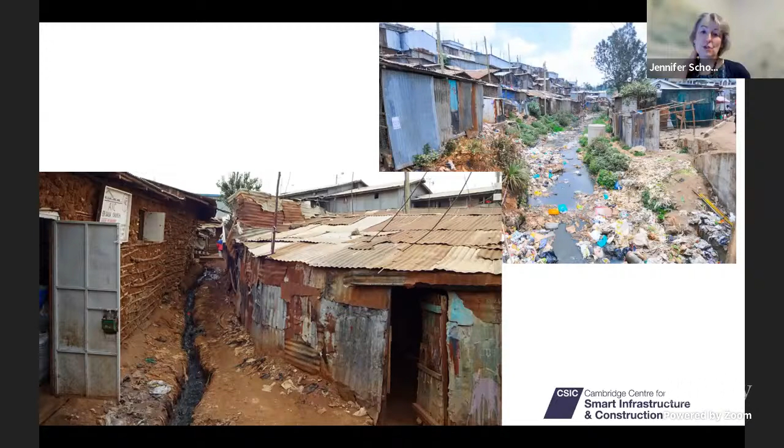It's not a terribly conducive environment for businesses to set up, and it's certainly not a particularly healthy environment to be living in. So without good infrastructure, this can be what life is like.

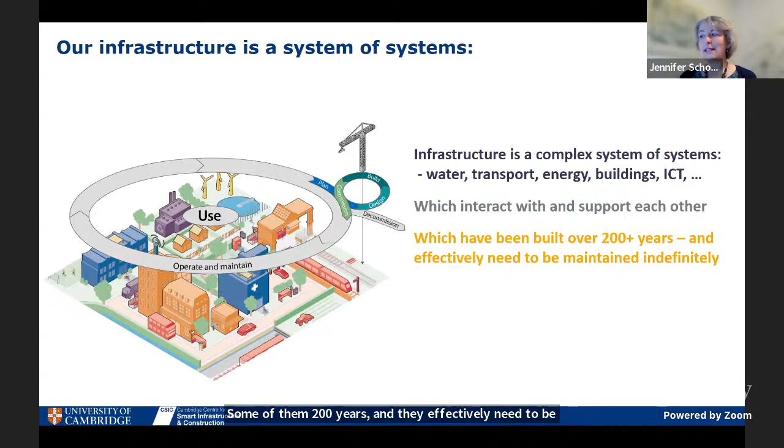The other key thing is that, certainly in large parts of the world, these infrastructure systems have developed over centuries. So in the UK and in the US, a lot of our infrastructure systems date back well over 100 years, some of them to 200 years, and they effectively need to be maintained indefinitely. The other thing is that these systems, although they are systems of systems, weren't really designed that way - they've sort of evolved and emerged. So they're quite complicated; it's quite complicated sometimes to understand all of the interdependencies between them.

The other important thing to remember is that every year, in developed economies, we only add about 0.5% by value to this complex system of systems. So in the UK we've got a number of huge infrastructure projects going on - a big high-speed rail project, and a massive super sewer being dug through the centre of London. Each of these huge projects, although they're costing many billions of pounds each, is a small intervention on that much bigger system they're going to be part of when they're finished.

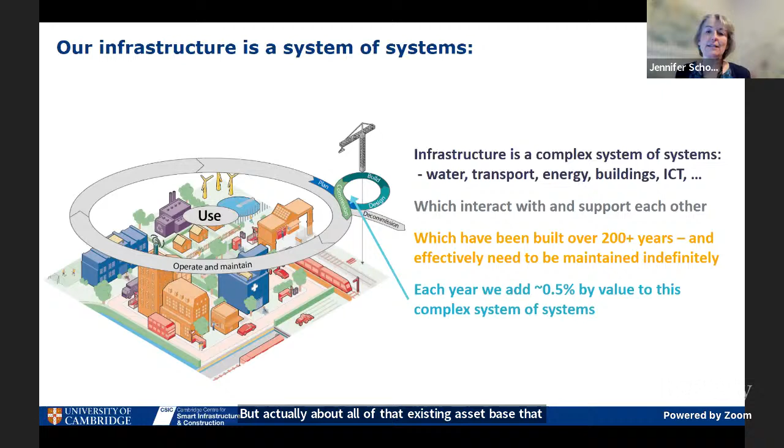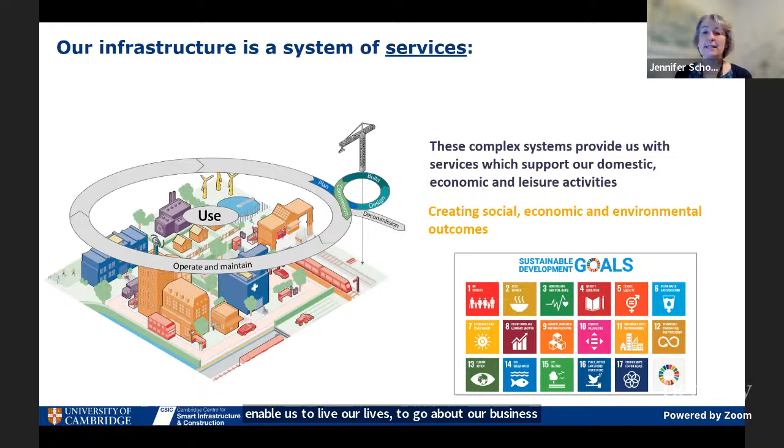So we really need to think not just about the new stuff we're building and managing, but about all of that existing asset base we have, which is what is actually providing the services and the value to society. These complex systems provide those services to enable us to live our lives, to go about our business, to have fun, and they basically facilitate well-being for us.

Because infrastructure assets last for such a long time, we need to take a whole life perspective of them. We need to think, if we're designing an asset or maintaining an existing asset, how long do we expect this asset to be used for?

If we are building a new asset, we need to think about the whole life carbon. If we invest a bit more material and carbon now, will that help us reduce use carbon into the future? Or might it have a very short life, in which case investing additional materials and carbon will be a waste?

How can we make the use of all of our infrastructure systems more energy efficient? And how can we make our systems easier to maintain? Because we live in a resource constrained world and a carbon constrained world, so every time we make an intervention on a system, we want to be maintaining our assets for as long as possible and keeping them functioning for as long as possible.

So it behoves us, when we're designing them, to think about how we're going to maintain them in the future and make that as easy and as resource efficient as possible a process.

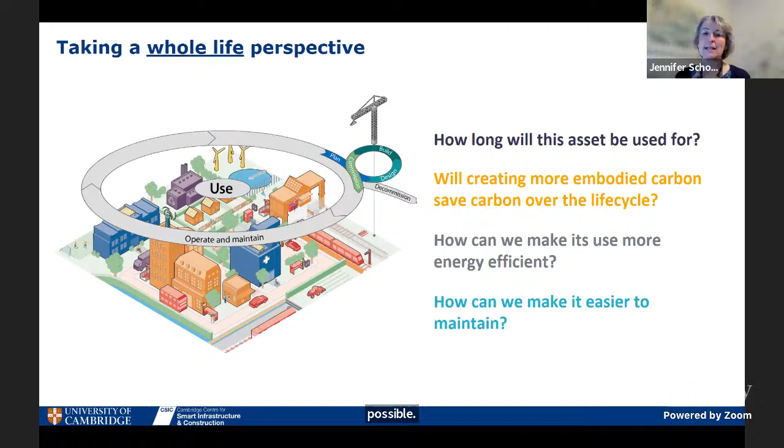Civil engineers have responsibility for designing, building, operating, managing and integrating our infrastructure and built assets essentially in perpetuity.

This picture is an image of Liverpool, for those of you familiar with the city in the northwest of England. This is the Liver Building. One of the reasons I like this picture is it shows you a lot of very old infrastructure - we've got some old warehouses in the middle of the picture there, alongside a lot of very modern infrastructure, like a telecommunications tower of some sort there.

We've got wind turbines out in the ocean generating energy. We've got a port here, which is an active port bringing both passengers and goods into the northwest of England. So this picture really captures the complexity of our infrastructure and how it sustains our cities.

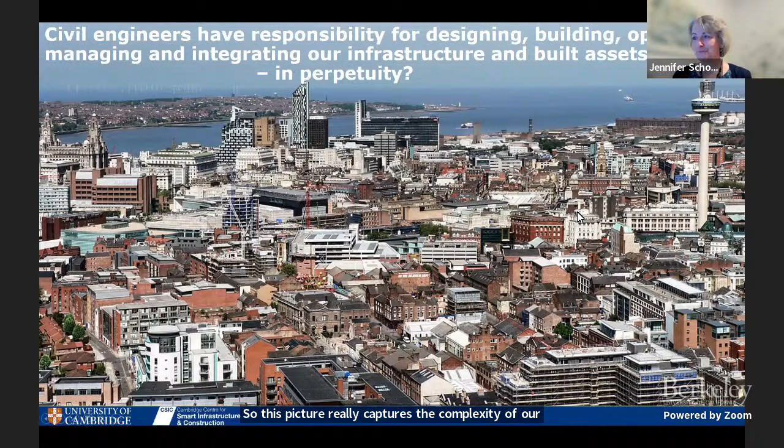So how can we use data to help us gain insights about our infrastructure systems? That's a very important question to answer. So what do we mean by cyber-physical systems first?

Cyber-physical systems are essentially systems where we use sensors and data from our physical assets. We analyse that, perhaps via a digital twin, which is the current buzzword, and we use that to make decisions and make interventions back onto the physical asset. So there's this sort of symbiotic relationship between the digital twin and the physical twin.

And we need that data about our infrastructure to design it, construct it, and to maintain it well and keep it operating efficiently throughout its life.

So adding sensors to our infrastructure helps us to collect better data, collect it more often. Rather than the traditional approach of people going and looking at infrastructure and taking notes, we now can capture digital data about our infrastructure consistently and potentially continuously, if that's helpful to us. Essentially, that's what makes up this smart infrastructure that I talk about a lot.

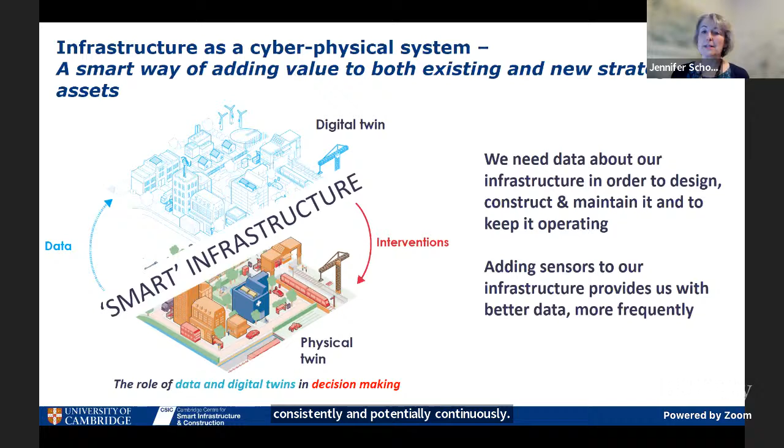In CSIC, the Centre for Smart Infrastructure and Construction, that I run, we talk about transforming the future of infrastructure through smarter information. We use that smarter information, gained from the use and development of sensor systems, to help with performance-based design - understanding the real performance of our assets - to help transform the way we build and construct our assets and the way we manage and operate them, and also how infrastructure serves our cities and communities.

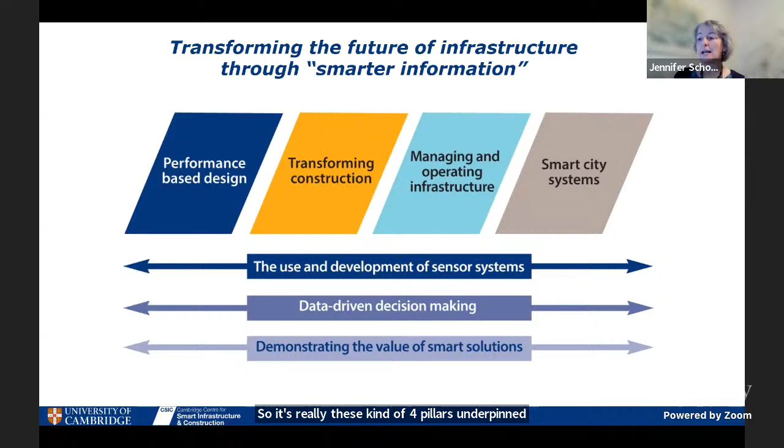So it's really these four pillars underpinned by the use and development of appropriate sensing systems to help with data-driven decision-making.

And I'm a big fan of Lord Kelvin, who back in 1883 said, if you don't measure it, you can't improve it. And he's absolutely right. If we don't understand how something is actually performing, how do we know whether we're making a difference to it or not when we design things differently, construct them differently, or try to make them perform better?

So very much in CSIC, we look at learning from real performance, so that we can reduce uncertainty, both in design, in condition assessment, in construction and in asset management, and also so that we can create infrastructure solutions to make our cities more resilient.

And ultimately, we look at how we deliver knowledge, tools and approaches to help us meet the three grand challenges of our time around resource scarcity, the drive to zero carbon, and the need for resilient infrastructure.

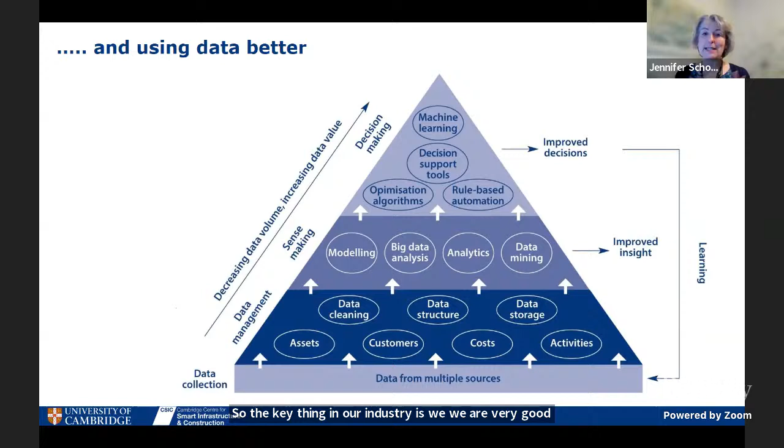The challenge really, though, is not only using better data, but using data better. So the key thing in our industry is we are very good at generating data. It's not always digital data. Sometimes it's paper data. Worse yet, sometimes it's PDFs, which are not digital data, if anyone tries to tell you that they are - they're just digital paper. But the challenge is often data in our context is generated, looked at once, and then either archived somewhere it can't be brought back from, or thrown away. So we don't gain insights from it.

We don't learn from it by looking at time series of data to understand how perhaps the response of a bridge is changing, for example. So the crucial thing about digitalization and smart infrastructure is that we must curate our data. If you take nothing else away from this talk, please remember that data curation is crucial to being able to better understand our infrastructure. These assets, which we hope will last us for many decades, if not centuries, we really need to think about how do we manage data about them over the whole life cycle of the asset, so that we can analyze it, create models from it, and draw sense from it to inform our decision making, giving us better decisions and improved insights about our assets.

If we have that better data, then there's a whole range of things that we can do. For example, in design, we can calibrate models so that we can end up with better resilience and lower resource use. For construction, we can improve the processes so that we reduce waste, reduce capital carbon, improve quality and delivery, for example. And in operations and maintenance, we can take approaches around things like future-proofing, condition monitoring, and risk-based maintenance and management approaches. And in the smart city realm, we can really think about the infrastructure needs that our cities and communities have. For this talk, you probably hear quite a lot often about design and construction processes, so I'm going to focus on a couple of examples from operations and maintenance and from smart city systems for the rest of my talk.

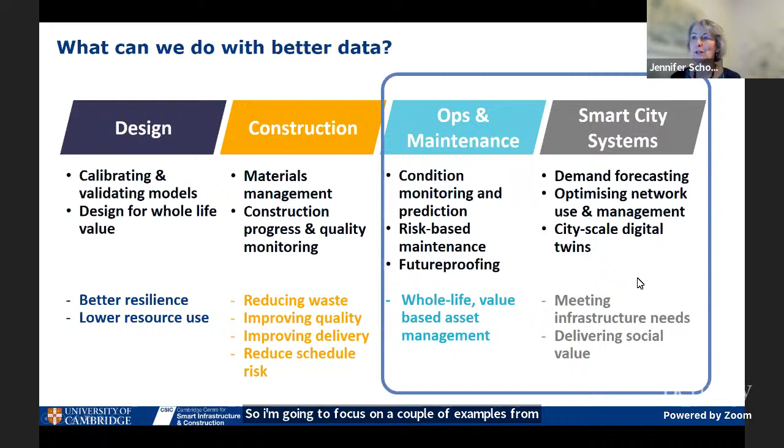So whole life value-based asset management. Asset management is the discipline of creating value for your business or your enterprise from your physical assets. So whether that is a water company, or whether that is a railway company, or whether that is a bank sitting in a building in downtown San Francisco, it's about understanding how the asset brings value to your business. Now, for the big linear infrastructures like rail, power, water, and so on, clearly the value to the business is very much tied up in those physical assets that are being owned and managed.

And this value is brought both through individual assets - if you look at the bottom here, at the individual asset or project level - and also at the network level. So we need to understand, for example, the budget that we have to manage a whole system of assets in order to understand what interventions we can afford to make on an existing asset. But likewise, we need to understand the condition of our existing assets in order to make sure that they continue to function within our network and continue to be able to provide the service.

So I'm going to focus on bridges for this part of the talk, with thanks to my colleague Manu, who provided me with these slides, some work that we've been looking at around how we understand risk in asset management and how we take account of that in the way that we think about our need for maintenance and management of our physical assets.

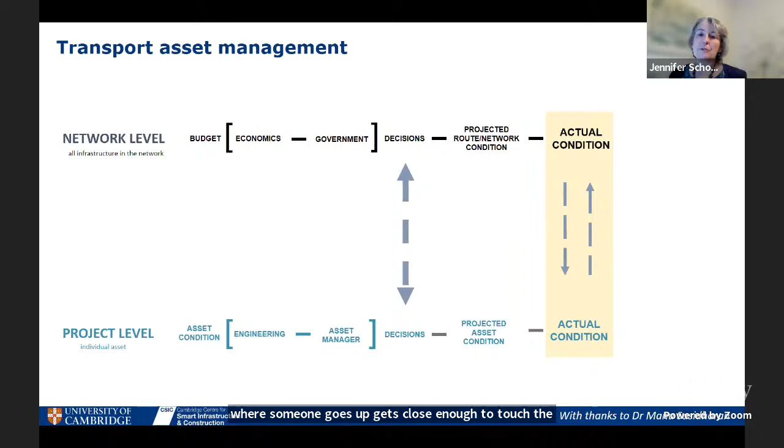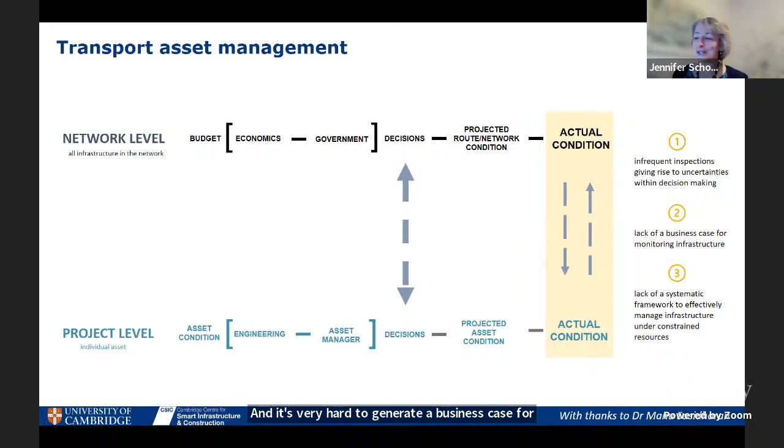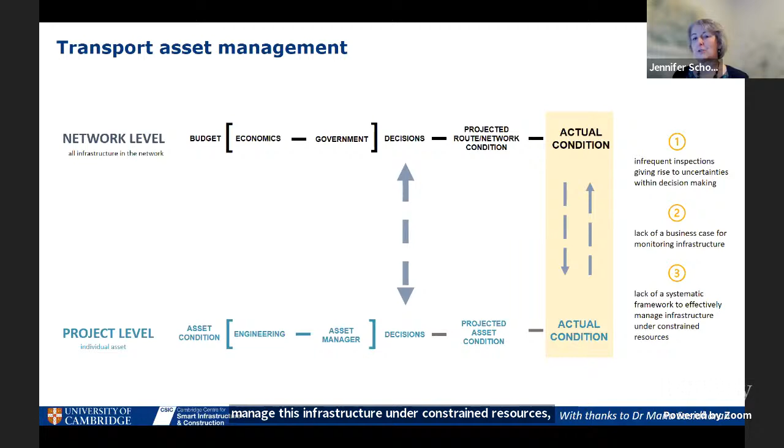So the challenge is that these infrequent inspections mean that we have uncertainties in our decision-making processes, and it's very hard to generate a business case for monitoring infrastructure because we don't really understand the condition of the infrastructure in the first place. And because we don't have a systematic framework to manage this infrastructure under constrained resources, we are increasingly at risk, particularly in the context of climate change, of our assets failing.

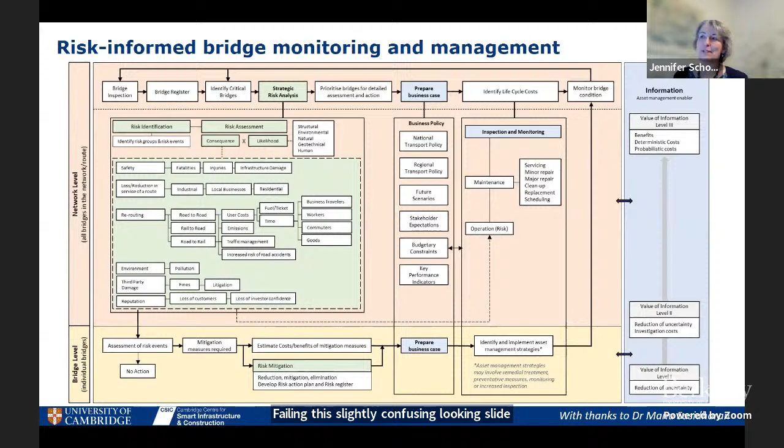This slightly confusing looking slide is looking at how we can take an approach to risk-informed monitoring and management. The key thing is that one needs to have a register of one's assets to start with, and one needs to be able to identify critical bridges. Critical bridges are the ones that are vital to the network.

So they might be a node which, if it failed, would cut off part of the network or cause need for a very long diversion, or they might be a bridge that carries, for example, several mass transit routes.

Once you've identified your critical bridges, then you need to do a strategic risk analysis about these bridges, which includes identifying all of the risks that the bridge may be subject to, assessing the consequence and likelihood of that risk. The consequence of failure, for example, may well be safety in terms of fatalities and injuries, but all the way down to things like reputation. And likelihood is based largely on the condition of an asset and the conditions it will be seeing in terms of environmental conditions and so on.

So these elements of the risk assessment are really important. I think I've highlighted reputation here because often, as engineers, we forget that if an asset fails, it's not just about the cost of reinstatement, it's also about the disturbance to the service that causes. So if a bridge fails, transport can't pass.

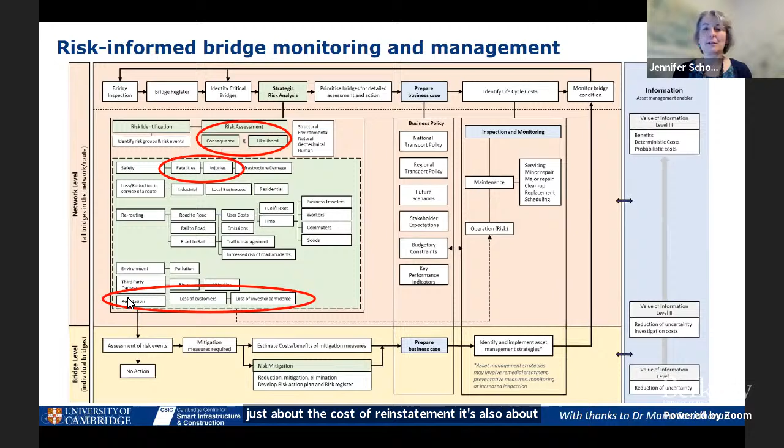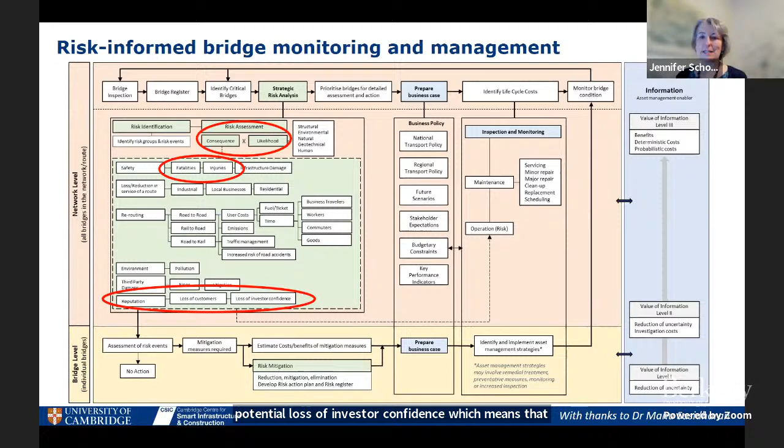If a water main fails, you can't provide fresh water to citizens. And so that comes with a loss of reputation and a subsequent loss of customers and potential loss of investor confidence, which means that it becomes harder actually to provide your service, maintain your systems and so on. But we're generally doing all of this within budgetary constraints.

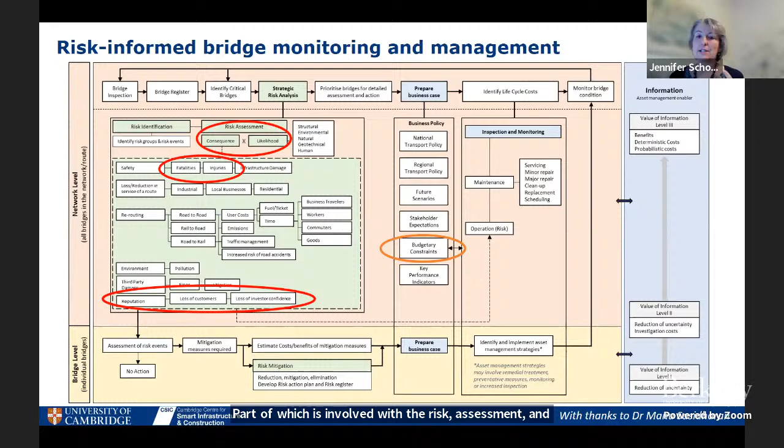So we have to understand how to prioritize our interventions, part of which is involved with the risk assessment and understanding actually which bridges are most critical in terms of our ability to deliver service.

So in terms of individual bridges, you have your business policy, which is informed by, for example, national transport policy, regional transport policy, any future scenarios that we may be considering, stakeholder expectations, etc. Inspection gives us a register of bridges which are potentially at risk, and our criticality assessment tells us which of those are most vital to our network.

So that helps us focus which bridges we need to prioritise for monitoring. And once we get that monitoring data, we're in a much better position to understand what maintenance is required and when, and to carry out life cycle cost analysis.

So sometimes an asset may need repair, but it might not absolutely need repair today. What we need to understand is the consequence of, for example, delaying that repair—will it end up in a much more costly repair in a year's time if we can't schedule it in this year's budget? And that's all very important, but it's quite tactical.

And what our asset management often doesn't take account of, and increasingly needs to, is the impact of challenges like climate change on the condition of our asset base. So I'm going to talk a little bit now about the work that Manu's been doing around future scenarios.

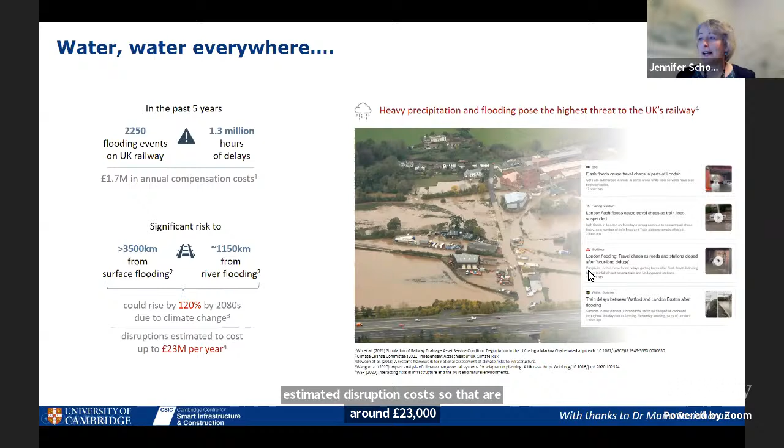That becomes even more of a problem when we start to think about rivers and bridges. Bridges suffer from a phenomenon called scour, which is essentially where the bridge pier's foundations go into the riverbed. Scour happens when high-speed water comes down and starts to wash away the material around the foundation. So you can end up with a bridge pier that is no longer standing on solid ground, and therefore the bridge fails.

In the 150-odd years there, we had 140 scour-related railway bridge failures. In 2020 in the UK, scour resulted in 10 full collapses and 30 partial collapses of local road bridges. So this is an issue that is absolutely happening. If you look at that top figure, it's an average of about one bridge a year failing through scour on the railway network alone.

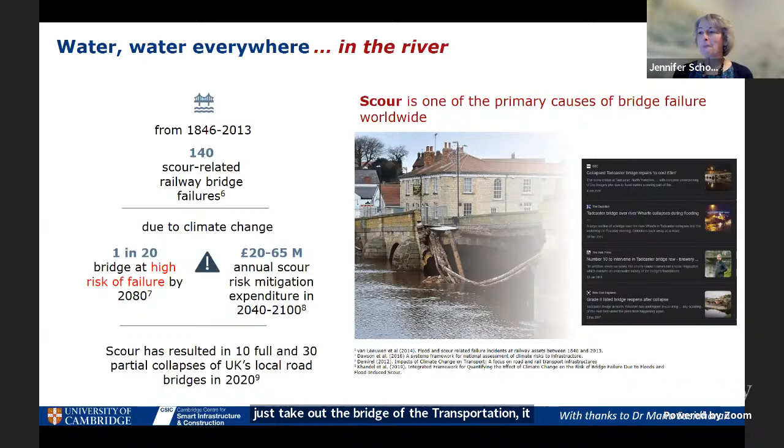So scour is one of the primary causes of bridge failure in the world. How do we go about preventing or mitigating scour? Well, obviously we need inspection and monitoring. We need to understand the condition of our pier foundations. But we also need to think about how we can predict the future condition of the infrastructure.

As you can see on the right-hand side, this is a cartoon of a bridge and its foundations. As the river flows, you can start to get this undermining of the bridge pier. What that does first is create a certain vulnerability in terms of lowered stiffness, but if the scour gets low enough, it completely washes out the foundations. Changes in the magnitude and frequency of river flooding will change the river morphology and change its capacity to scour these foundations, because it can transport more abrasive media with it, for example.

Our national rail management organisation, Network Rail, has a scour risk assessment standard which has been deemed to be unresponsive to an uncertain climate future. So it's probably doing okay for today, but even in 10 years' time, this scour risk assessment approach is probably going to be inadequate to really understand the true risk to our railway infrastructure.

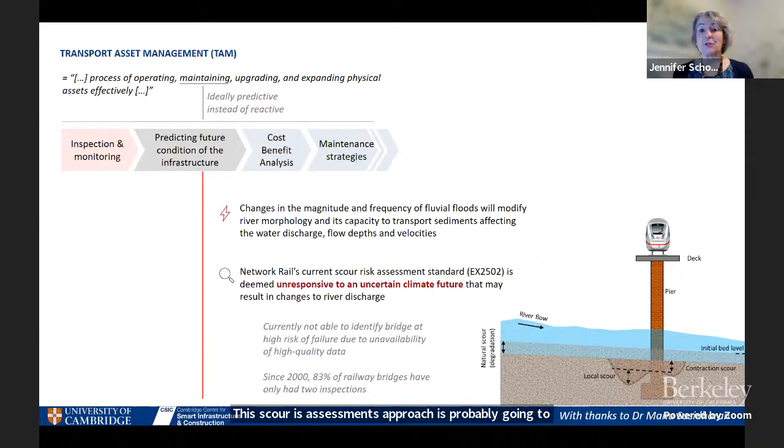So we've been working with Network Rail to look at how they can improve this, and the approach includes looking at climate predictions, carrying out hydrologic modelling and estimating the river flow discharge as a result, and using that to predict scour depth during flood events, so that we can at least have a scour risk classification and understand which of our bridges on a network are most vulnerable.

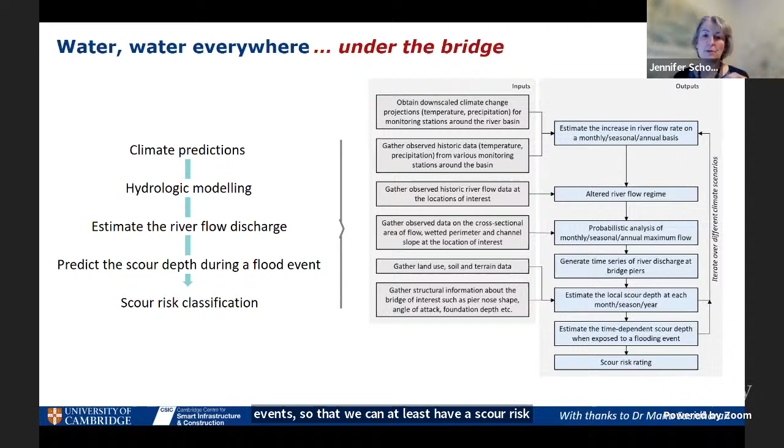That can then help us prioritize our interventions around more frequent inspections, for example, understanding which ones it's most important to perhaps do remedial work on the foundations for.

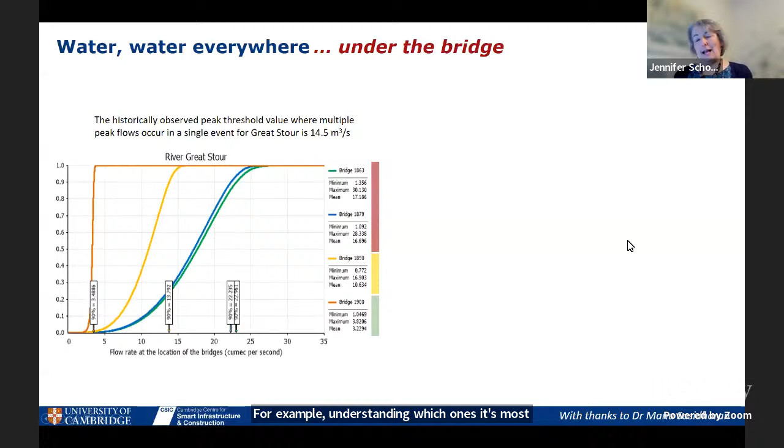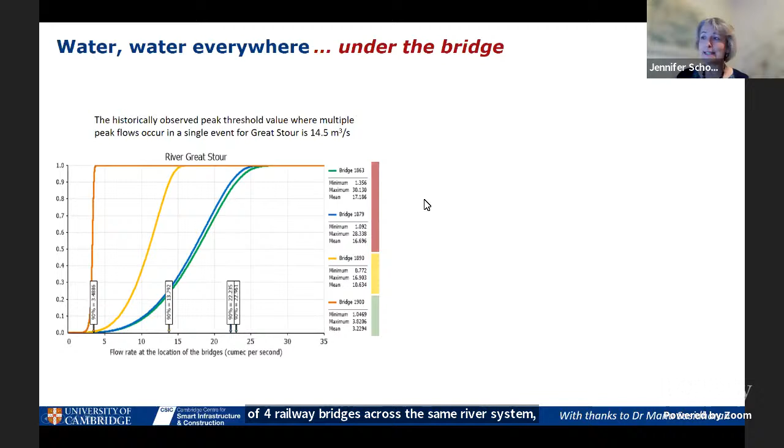The example I'm going to talk through quickly is 4 railway bridges across the same river system. These 4 bridges, in the orange, yellow, blue, and green locations, have maximum flow rates at a typical peak flow that vary quite substantially. We've got a bridge here where the peak flow is around 3.5 cubic meters a second, versus a couple of bridges over here that are up at 23 cubic meters a second. So very radically different river flows.

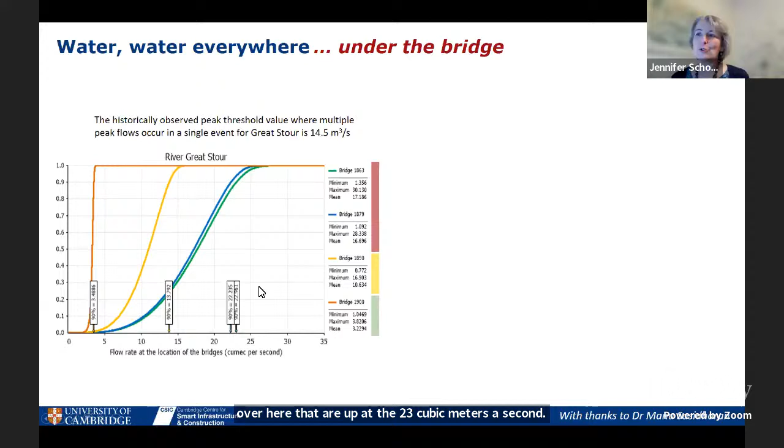But that doesn't actually give you a good idea of the risk to those individual bridges, as I'm about to show you. If we look at the bridges standing in the green and blue locations, they've got much higher peak flow rates.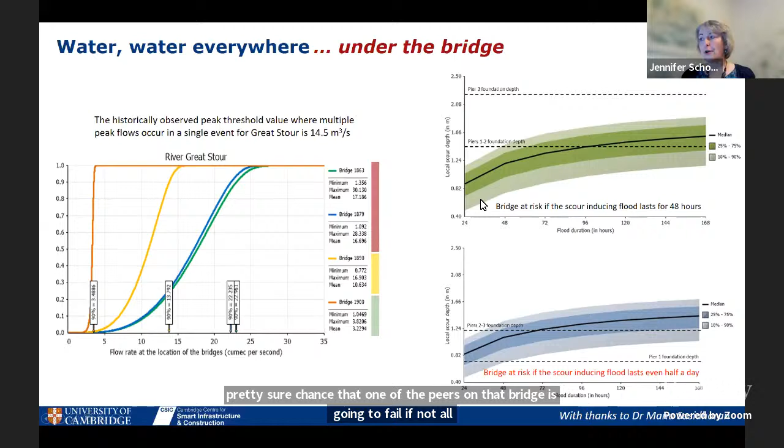On the other hand, if you look at the blue bridge, even if the flood lasts for half a day, you've got a pretty sure chance that one of the piers on that bridge is going to fail, if not all 3 of them. So although those bridges see very similar flow rates, the bridge in the blue location is at much higher risk of scour failure than the one in the green location, although the green one isn't looking that happy either.

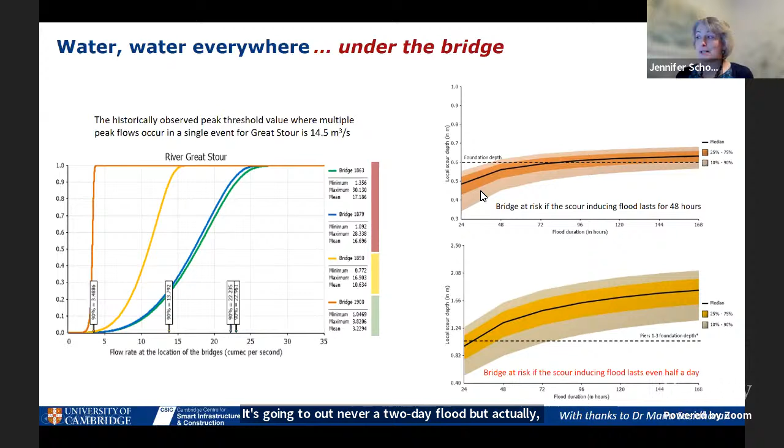In contrast, when you look at the 2 bridges at lower flow rates, you might think they're probably fine since the other bridge is going to outlive a 2-day flood. But actually, they've got much shallower foundations. The scour risk for the bridge in the lowest flow location still carries a 10% risk of that pier failing if the flood lasts 48 hours. And the one in the yellow location, if the flood lasts more than about 12 hours, there's a serious risk of scour failure.

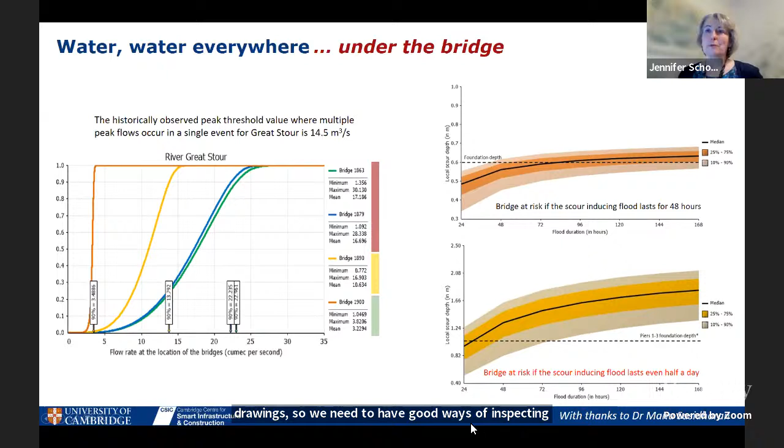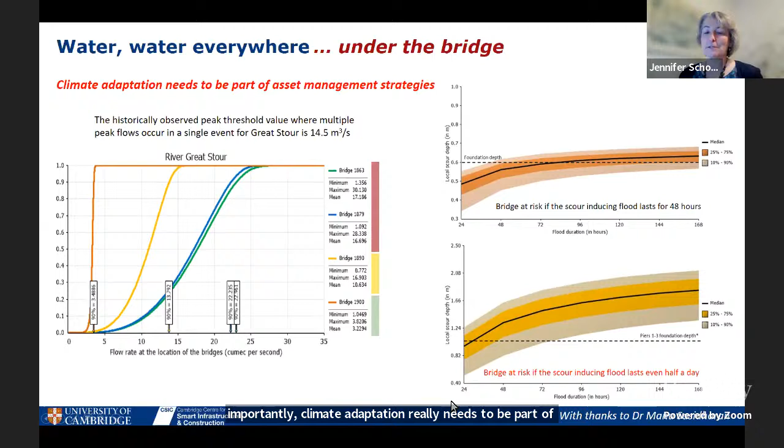So this gives you a sense that we need to understand the morphology of the river, the weather conditions we expect to get, and the condition of our assets—their design, how deep the foundations are. A lot of our assets in the UK were built in the 1850s, and we don't have good drawings, so we need good ways of inspecting and understanding how they were built and their current condition. Most importantly, climate adaptation really needs to be part of our asset management strategies, understanding the impact of future climate on our existing assets.

I also wanted to touch on the use of digital twins for structural health monitoring. We are capable these days of gathering vast quantities of data about assets, and it's not always easy to handle that data and use it to gain actionable insights.

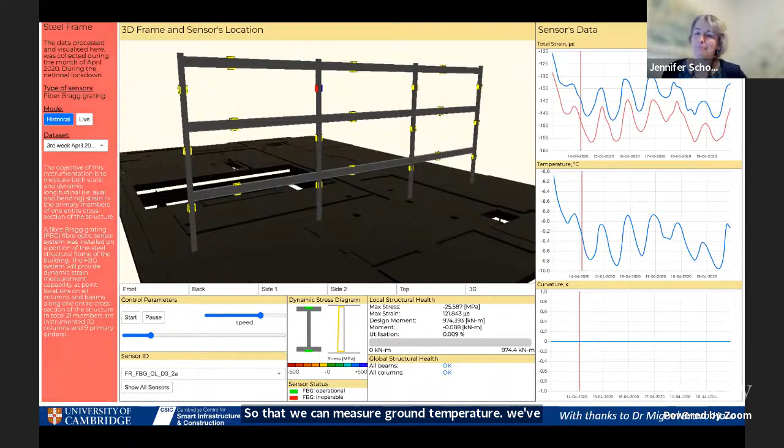We've been doing some work in CSIC on our relatively new civil engineering building, where we've instrumented a lot of it—the steel frame, the ground source heat pumps, and the 2 boreholes. We've actually dug a dummy borehole in between them so we can measure ground temperature. We've also instrumented the blue and green roof, and we're streaming that data continuously to a website where we can explore it live and see what's coming off it.

This is a recorded video because I didn't want to risk bringing up a website in the middle of a talk. But what you can see here is that by streaming that data, we can start to look at the impact it's having on the performance of the building. The steel frame, as you'd expect, is largely doing very little—you can see a little bit of tension and compression on the vertical upright there.

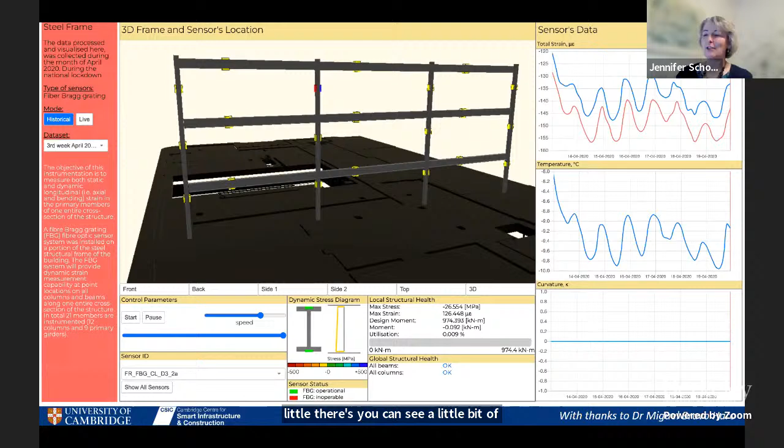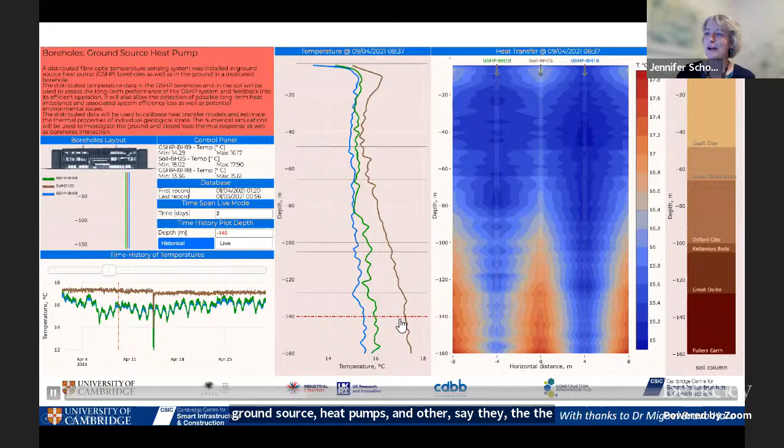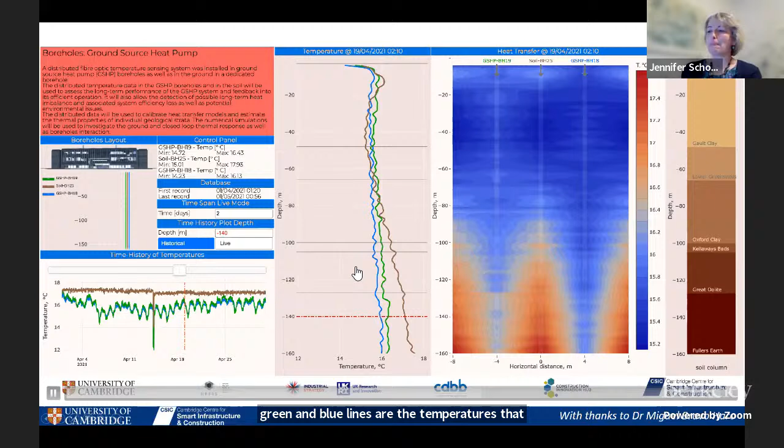What's perhaps more interesting is the ground source heat pump. We have 3 boreholes here, the 2 ground source heat pumps, and the soil temperature measurement in the middle. The soil temperature measurement is this brown line, and the green and blue lines are the temperatures we're getting from the heat pumps themselves, the water temperatures.

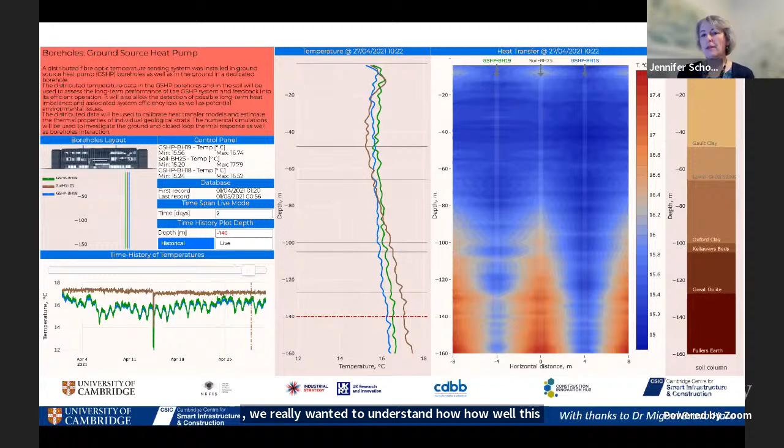The reason for instrumenting this was we really wanted to understand how well all of this was performing, and whether there was any danger of us saturating the temperature in the ground, making it impossible to use that for heating and cooling, because we have the aspiration across the whole of our West Cambridge campus, where this building is sited, to move to ground source heat pumps as a renewable form of heating and cooling.

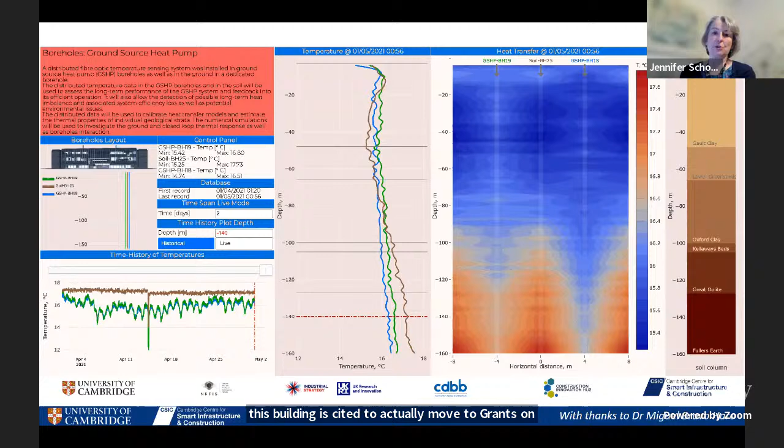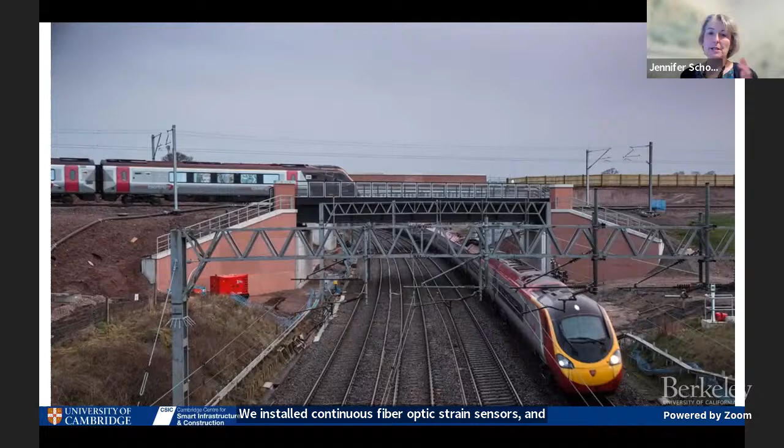The other digital twin project we're actively doing at the moment is the digital twin of this bridge. When this bridge was built about 5 or 6 years ago, CSIC was involved in instrumenting essentially everything on it. We installed fibre Bragg grating sensors, continuous fibre optic strain sensors, and since then we've installed accelerometers, cameras, and so on.

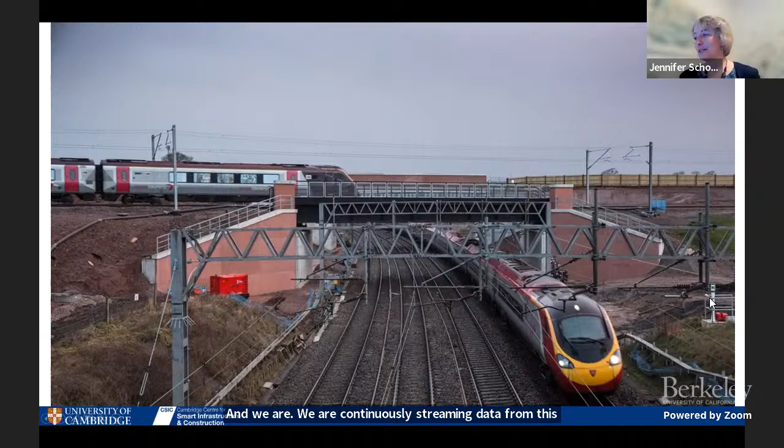It took us a couple of years to get the power installed to enable us to do that, but we're continuously streaming data from this bridge now.

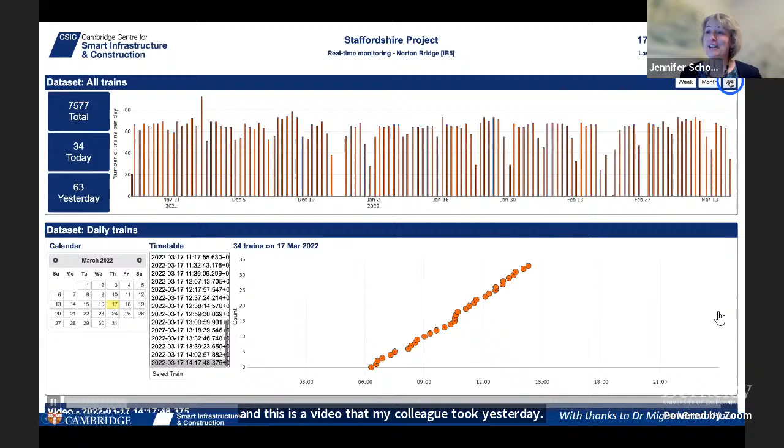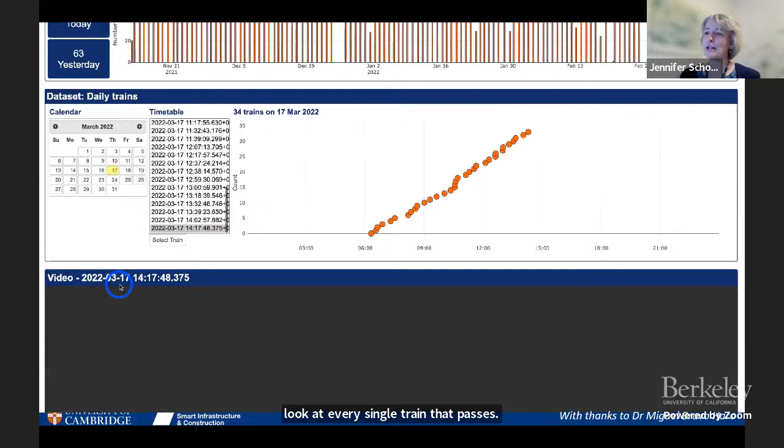This is a video that my colleague took yesterday. You can see 17th of March, where Miguel was basically doing this to show us that you can look at every single train that passes. So we're counting the number of trains per day, and for every individual train that passes, we're capturing strain data, video data, and accelerometer data, which is helping us characterize the behavior of the bridge.

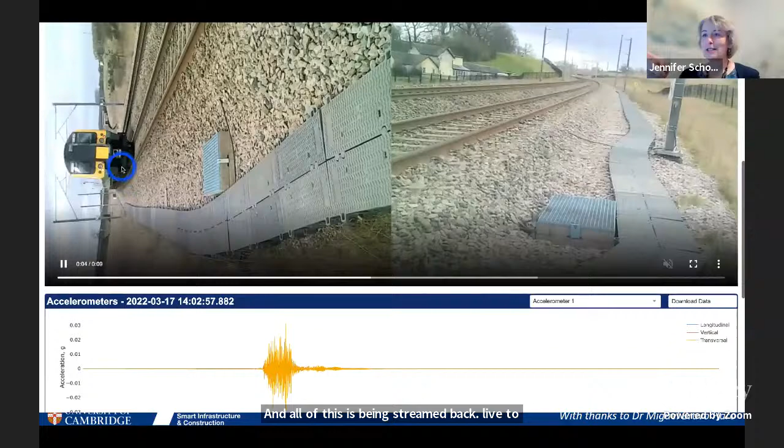All of this is being streamed back live to Cambridge. You can see one of the cameras has fallen over and we can't get to it to make it upright, so if you want to see what's happening with that train, you have to turn your head over.

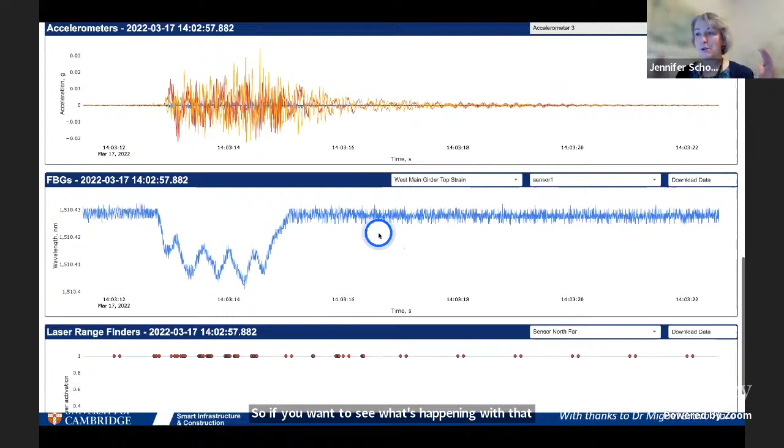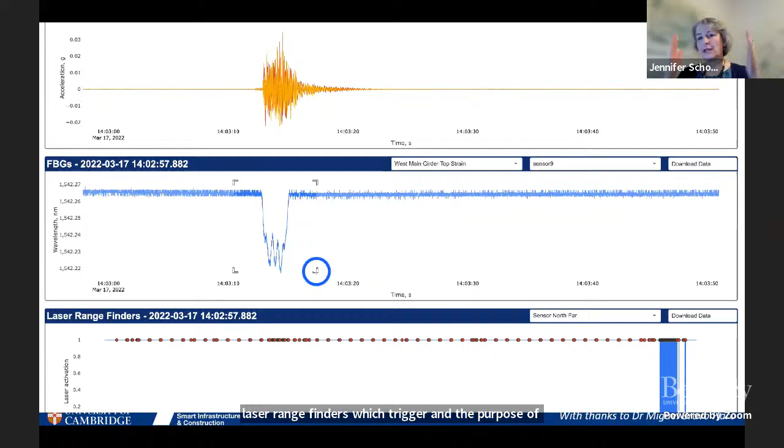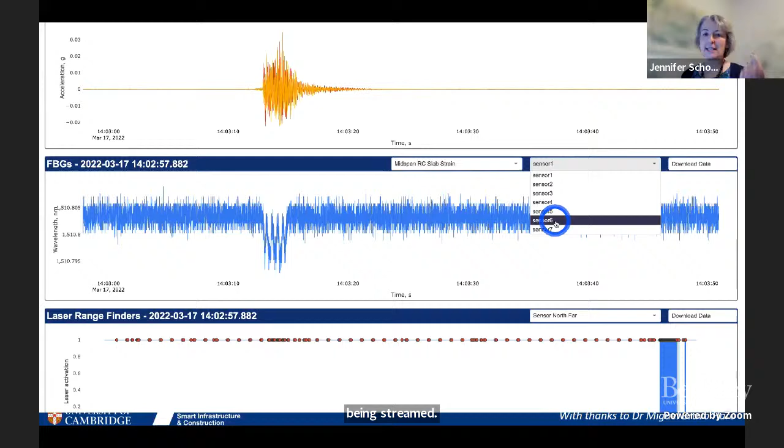Essentially, we have motion sensors or laser rangefinders, which trigger the data capture. The purpose of the laser rangefinders is to enable us to make sure we capture the data that's of interest, because if there's a train every half hour, there's an awful lot of data being streamed that's essentially telling us nothing. So we're using the rangefinders to trigger the data capture so we're only streaming back the data that's of interest to us. Otherwise, we would have gigabytes a day coming off the bridge.

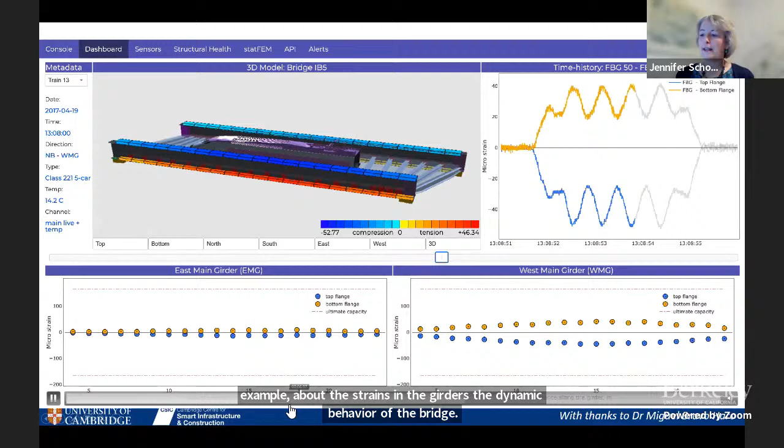That then is streamed into a digital twin where the data is analysed to give us information about the strains in the girders, the dynamic behaviour of the bridge, what its response to vibration is, and so forth. Ultimately, that data can then be fed into a finite element model to give us more detailed information about the condition of the bridge.

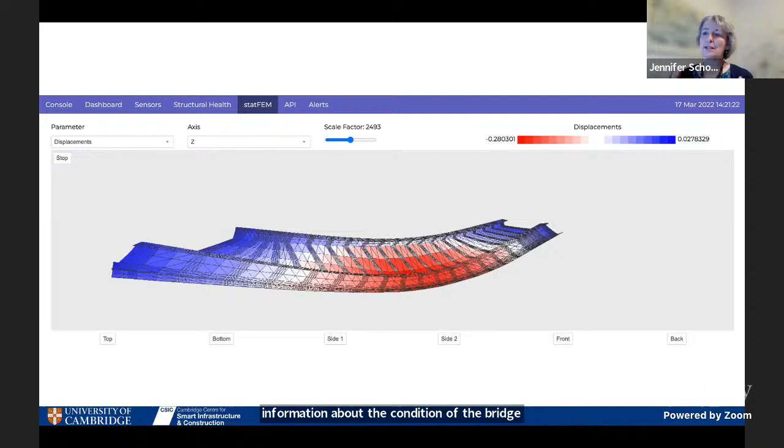So this is just a small snapshot into the kinds of things we can do with live data, and the ways we can make it comprehensible to humans, because the quantities of data being streamed we couldn't possibly deal with in any other way.

This brings us to my last topic, which is smart cities and delivering public value. The reason I wanted to talk about this is that once we get beyond measuring the characteristics of an engineering artifact like a bridge, people start to become involved in the data capture. Data starts to get captured about us as well as about the things we're using. It's important in the context of cities and governance to think about what value we're trying to deliver from any digitalization activity we might carry out.

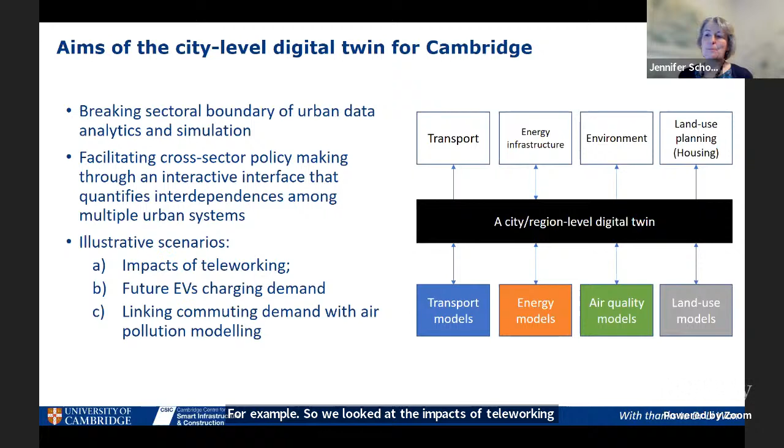So we looked at the impacts of teleworking, the future charging demand from electric vehicles, and the link of commuting demand with air pollution. I'm very quickly only going to talk about one of those because I realize I'm running out of time. So the electric vehicle charging question was an interesting one, because we looked ahead to 2051.

We looked at the projected housing and the projected jobs in the future, and therefore the projected commuting journeys. And what we wanted to do was look at, if all of those vehicles are electric, which legislation says they are going to have to be, what implication does that have for the electricity network?

And we looked at the case of if all vehicles charged at the workplace versus if all vehicles charged at home. And what's interesting about this is the different scenarios actually bring stress into the grid in very different places.

If all vehicles are charged at the workplace, as you'd expect, there's quite a lot of stress on the grid in the city, so within Cambridge and in the city of Peterborough. If all vehicles are charged at home, however, you can see that there are actually some fairly stressed parts of the network outside of the towns and cities.

And what this does is enable us to look at policies around how do we create investment in the electricity grid, and if we can't afford to create investment in the electricity grid at a particular time, how can we use policy instruments to encourage people to either charge at the workplace or charge at home, or do a mixture of those things to manage demand on the grid?

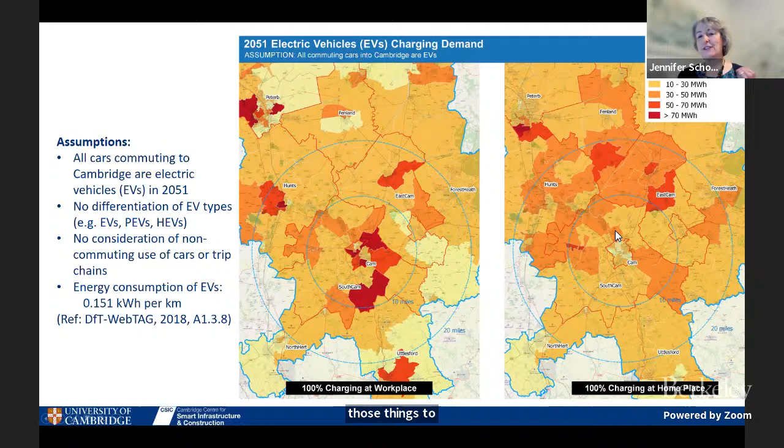So that's just a fairly simple example of the way that we might use digital twins in a city context. This particular digital twin had embedded in it not just the journeys to work, but also the socioeconomic profile of the people who would be living and working in different areas.

So that we could start to wrestle with things like the feasibility, for example, of working from home. If you're an electrician or a nurse, you can't work from home.

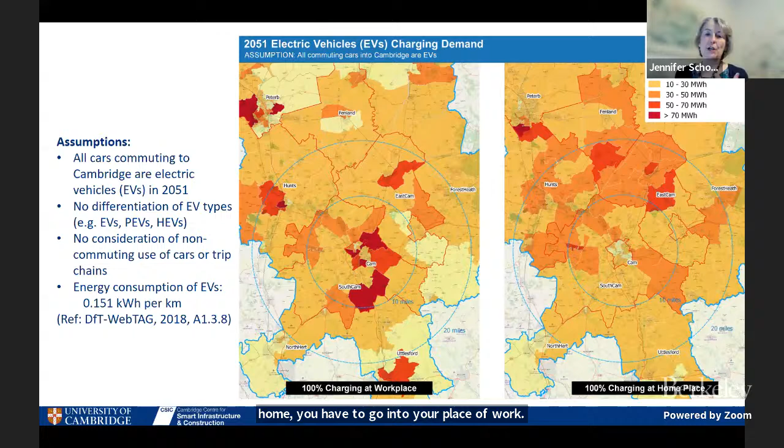You have to go into your place of work. You may well be working shifts. So that needs to influence the design of public transport systems, for example.

So digital twins are really helpful tools for decision making, but they must have utility. They can be used for things like optioneering and strategic planning, as I just showed. They can be used for evaluation and measurement—for example, how much material is in a given design, and how is that reflected in what and how we build it. And they can be used for operational management or long-term asset management as well.

So they're extremely useful tools, but we need to think quite carefully about how we design and manage them so that we can manage the amount of data we're getting from them, as I showed in the bridge example, but also so that we can use them in a responsible way and in a well-governed way, if we're doing that in a context where information about people starts to get involved.

I'm pretty much out of time. I did briefly want to touch on how, as an organisation, CSIC has been able to have influence on both professional practice and on policy. So I will do that very quickly.

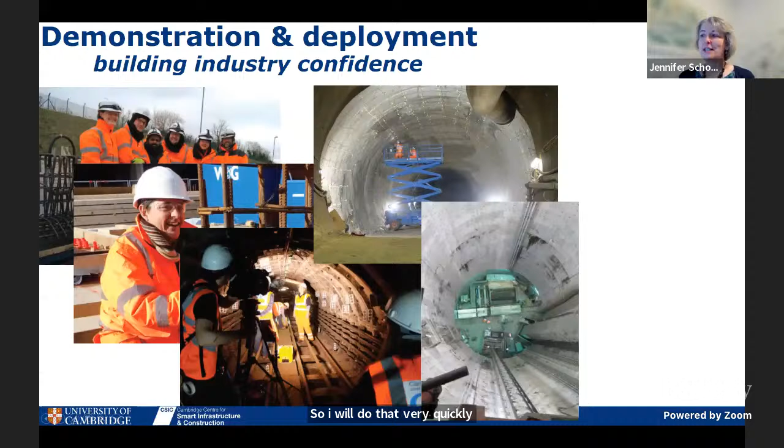One of the things we've done is do things in the real world to build industry confidence. So all of these pictures are CSIC researchers working in real construction and infrastructure environments alongside people from industry to test out the approaches that we've been developing. And that has made a big difference to the potential for industry to adopt our solutions.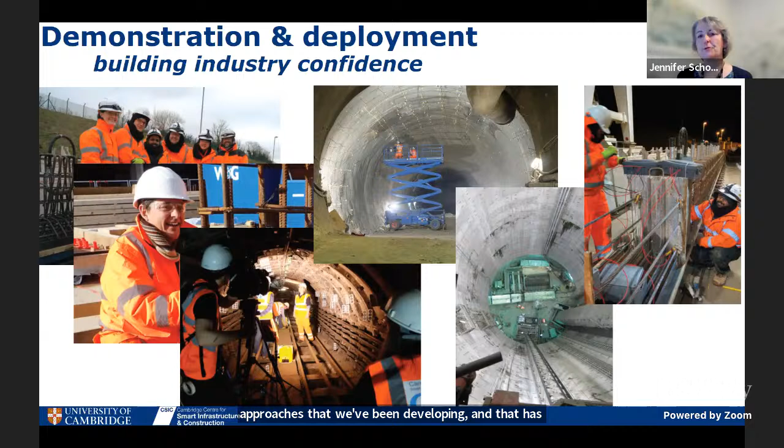We've done an awful lot of knowledge exchange. We've done training, we've run conferences for industry. But the other thing we've done a lot of is guidance and input to standards.

So we've written a lot of documents with the Institution of Civil Engineers, which is our equivalent of ASCE. We have developed methodologies and developed industry guidance for how to deploy those methodologies. And we've also written a number of thought leadership papers and tried to have input to some of the positioning things that come out of our National Infrastructure Commission and documentation that the Institution of Civil Engineers produces on behalf of the Commission or to inform government policy.

And we've produced a number of these papers over the years, both ourselves and in collaboration with others, and we're seeing them have increasing influence. People have been picking up the diagrams and the images and the explanations that we've used and starting to use these sort of forms of language and the thought processes that we have to change the way that things operate in the industry.

And the most recent one of those is the Carbon Reduction Code for the Built Environment, which we developed last year and launched at COP26—essentially a framework to enable organisations in the infrastructure and construction sector to make a public commitment to a path to net zero and to report progress on that annually. And then for the industry to work together in a collaborative way to learn lessons from each other and accelerate progress towards net zero.

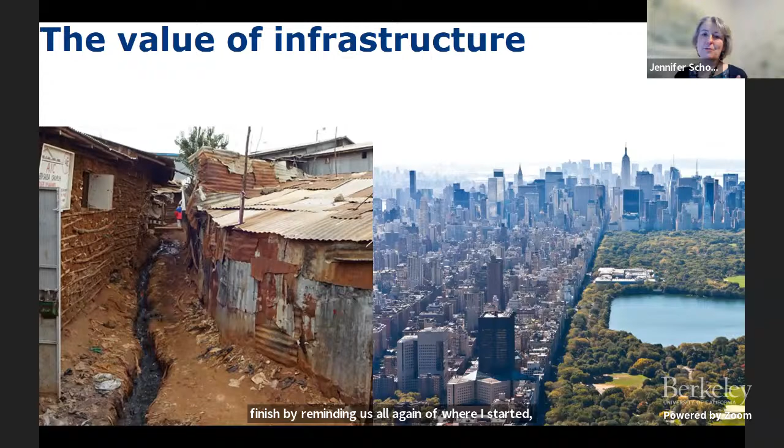So that's kind of the story I wanted to tell. And I just wanted to finish by reminding us all again of where I started, which is the value of infrastructure and the reason that it's so important to manage it well and take good care of it.